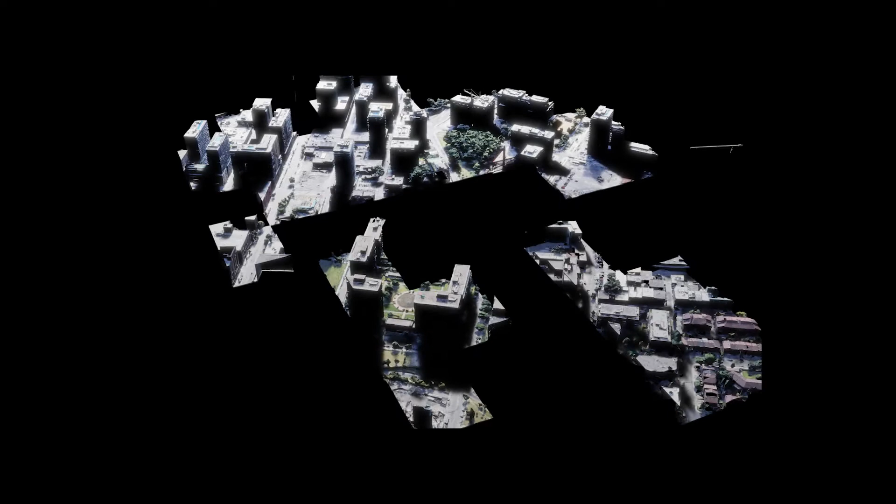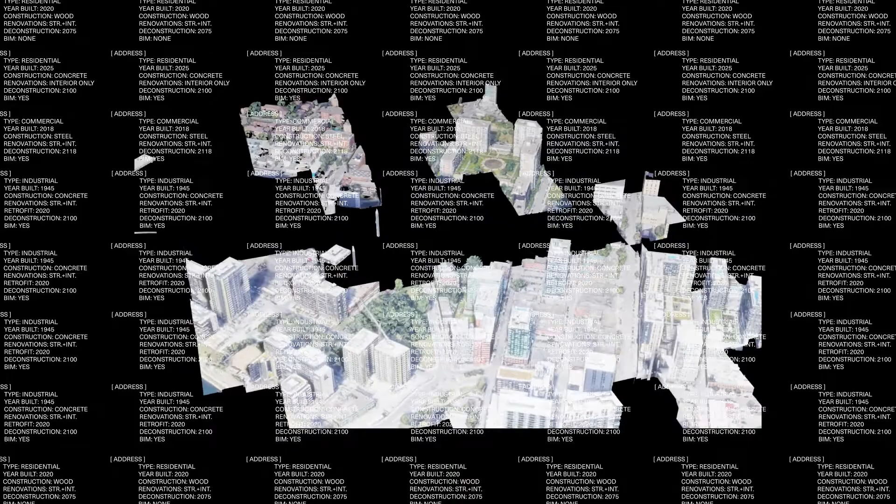The goal of this project is to introduce a system of collecting and cataloging the urban environment, turning demolition sites into public resources, and connecting all essential actors that can facilitate the flow of material reuse. By aggregating a multitude of data from the urban landscape and drawing from relevant concepts and research, this new model will enable a more material-sensitive representation of cities.

This catalog system or model can be compared to existing building stock models for greenhouse gas emissions and energy performance assessments, with an emphasis on materiality.

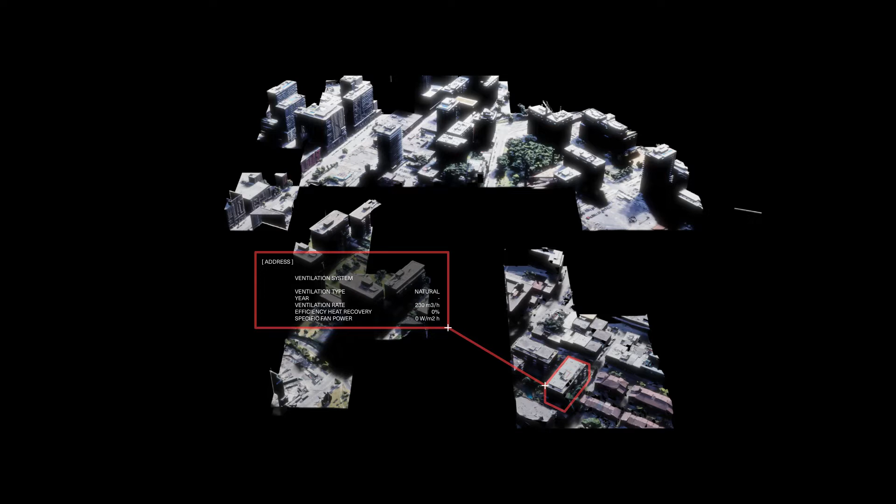Just like typical BSMs, this model will need to establish different building archetypes in order to represent typical segments of the city. Paired with a bottom-up approach, constant changes in the building stock can be identified through active user feedback, providing additional layers of information.

The integration of other existing systems of interdisciplinary processes such as BIM, free from legal restrictions, is also crucial to maximize information sharing among stakeholders. The ubiquity of BIM in building stock model assessments presents an opportunity to collect information on materiality.

OpenBIM is an open-source platform which extends the benefits of typical BIM usage by improving the accessibility, usability, management, and sustainability of digital data in the built asset industry.

By dismantling data silos and typical legal constraints around BIM softwares, OpenBIM allows for a greater flow of information going beyond peer-to-peer processes. Regardless of the software vendor, OpenBIM enables seamless exchange between different BIM softwares while ensuring access to the data at any given time.

In that sense, BIM assets can now live beyond their typical use and safely lay dormant until their next potential use for demolition, deconstruction, or material salvaging.

To ensure the feasibility of deconstruction and material reuse, it must begin at the design phase. Considering certain trends of closed cycle of use and reuse in the construction industry, it will be assumed that future construction will feature some degree of feasibility regarding design for deconstruction.

Certain on-site challenges related to demolition and deconstruction practices can potentially be alleviated with the use of BIM, which is typically implemented during the design, construction, and operational phase. BIM models must be prepared for deconstruction with data on end-of-life behavior of building products, such as degree of reusability

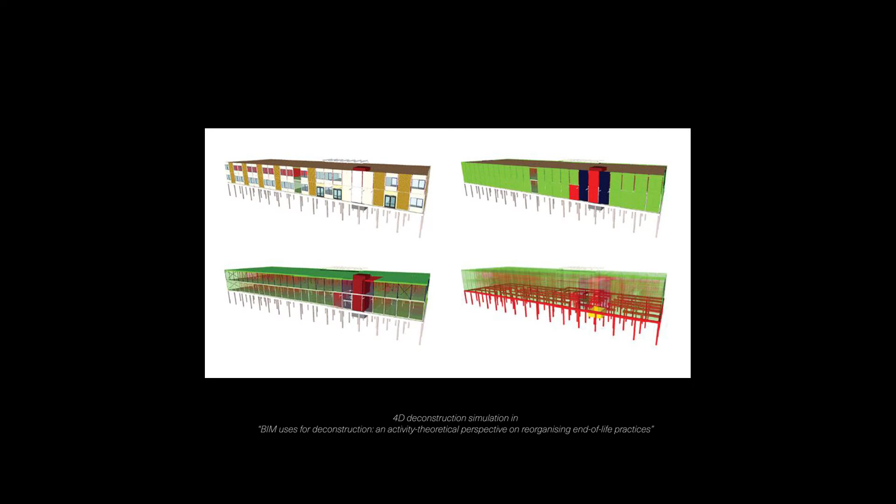and recyclability. In the paper BIM Uses for Deconstruction, an activity theoretical perspective on reorganizing end-of-life practices, Vandenberg, Voordijk, and Adriaanse suggest 3 new BIM uses for deconstruction: 3D existing conditions analysis, reusable elements labeling, and 4D deconstruction simulation. These additional features will prove useful within the context of the OpenBIM platform.

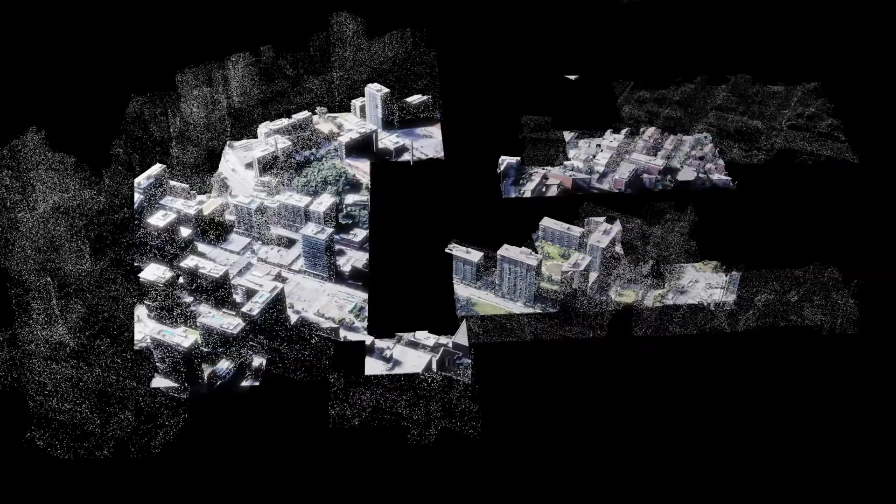Mining virgin materials is energy intensive, and much of this material flows to cities in the shape of buildings and consumer products. This urban ore, as described by Thomas E. Graedel in the Prospects for Urban Mining, can provide an alternative to mining new materials.

Materials that do not require intensive reprocessing, such as masonry, ceramic tiles, wood, glass, and pure metals, can easily be repurposed. Graedel also touches on the timing of the stock availability for mining, given that buildings are typically not demolished within at least 50 or 75 years.

Urban mining or material salvaging can also take place in renovation and small-scale demolition projects. European legislation, for instance, places material reuse as the preferred method for waste management. However, in the UK, only 1% of the waste generated by construction and demolition is reused. Reuse often finds itself at odds with heavily subsidized recycling programs, giving very little economic incentive for material reuse.

In most cases, salvage companies have to outperform qualities of new materials by generating value beyond economics, thus only appealing to a specific type of customers.

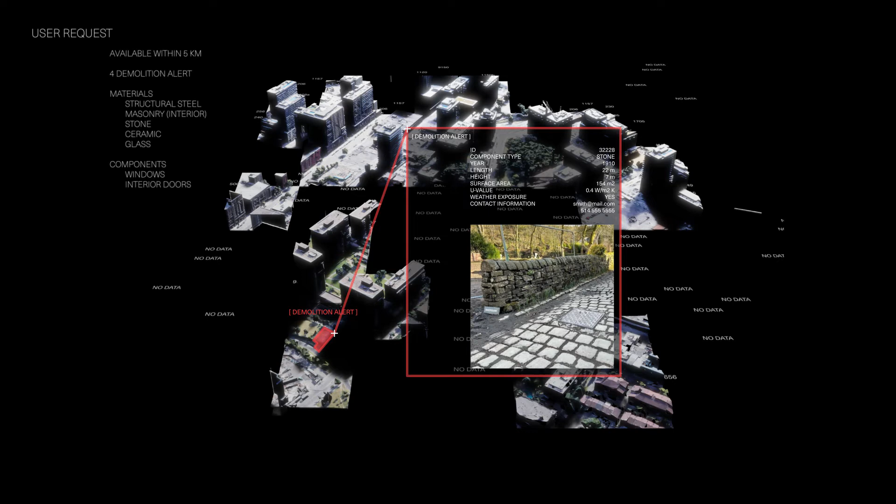The value of used material must become a fundamental conversation in architecture in order for reuse to become ubiquitous again. Up until the Industrial Revolution, the reuse of building materials was common practice, but within our current economic model, it has trouble regaining its place.

The goal of the Urban Mining Catalogue is to introduce a system that can respond to some of the challenges of previous initiatives by bridging gaps and enabling a better flow of materials within urban environments.

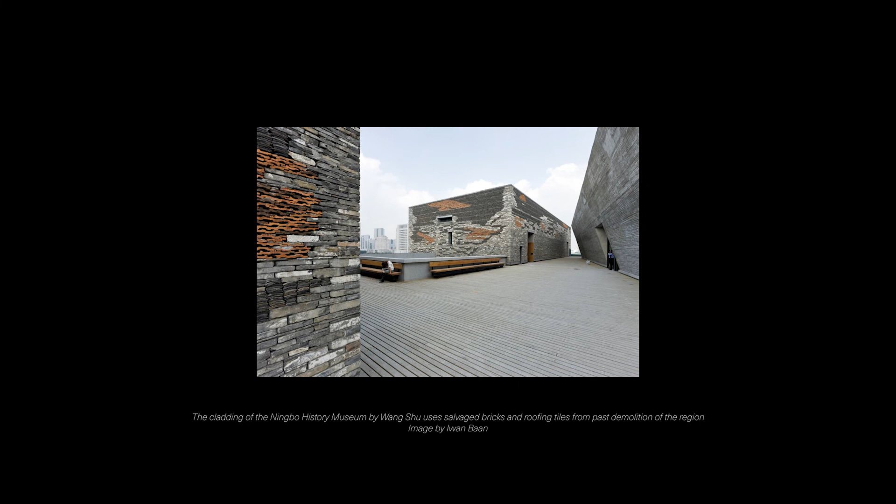Through the use of open BIM, concepts of deconstruction, and existing networks of salvage companies, reuse as a practice could be reinstated and take part in the larger discussion around circular economy and climate change.